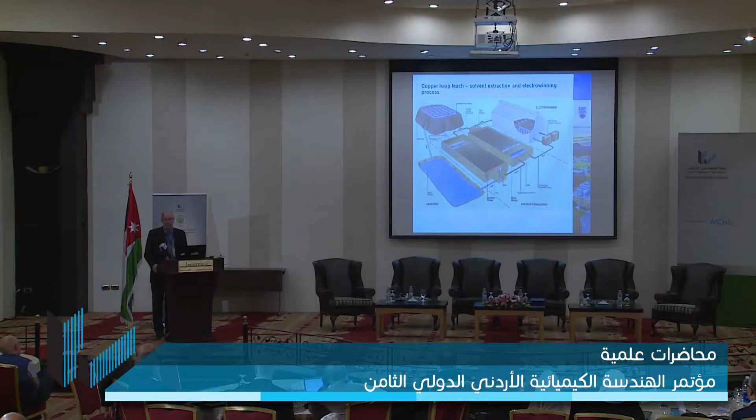So you see a pile of rocks which is being irrigated with an acid solution. The acid is percolating through the rocks and dissolving copper, which is recovered into a pond. The copper-bearing solution then goes through two stages of solvent extraction. So it's loaded on an organic solution, and then it's stripped using a stronger acid solution to make a concentrated copper solution, which then goes to electrolysis.

When the pad is finished, they then use drippers. It's like a farming operation, drippers on top of the pad to sprinkle sulfuric acid, which goes down through the rocks and dissolves copper. So the solution that's being collected in the ditches is a copper-bearing acid solution. That then advances to solvent extraction and electrowinning.

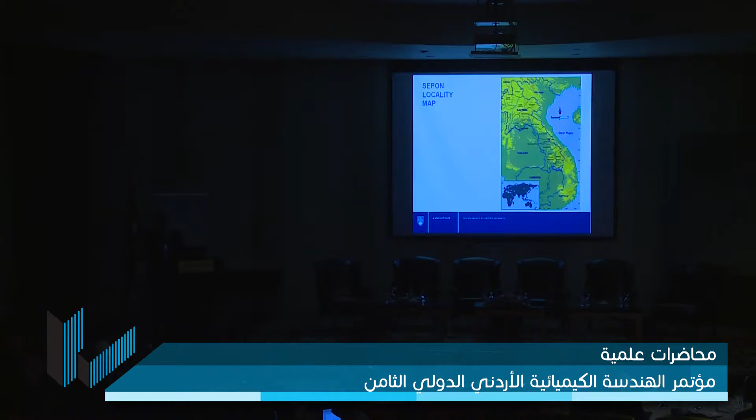When we started to look at this ore body, we found that whole ore leaching was effective at leaching copper from copper sulfides using a ferric-ferrous oxidation system. The trouble we had with the ore is that because of the clay present, the ore consumes a lot of acid, and the cost of acid in Laos is quite high. So in order to make the project economic, we had to determine a way to make our own chemicals in Laos, and this involved making ferric sulfate sulfuric acid solutions by recovering sulfur and pyrites from the leach residues by flotation and oxidizing those materials in a high-pressure autoclave.

And then the innovative part was the use of flotation at the end of the circuit in order to recover elemental sulfur and pyrites. The pyrites and elemental sulfur are directed to a high temperature autoclave where they're oxidized with oxygen in order to produce sulfuric acid and ferric sulfate. The sulfuric acid and ferric sulfate are then added to the main leaching circuit in order to meet the reagent demands for the process.

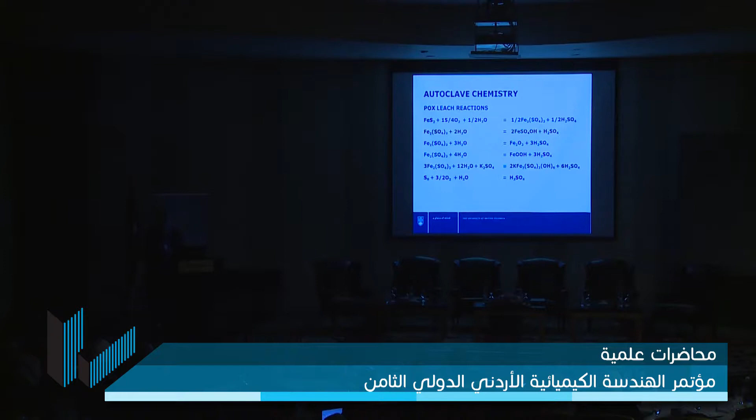So the reactions are oxidation, and in the case of basic iron sulfates, precipitation. So the red equation shows the formation of basic iron sulfates at high temperature in the autoclave. After the autoclave, the residue is allowed to condition at 95 degrees C for a number of hours, and this allows the basic iron sulfates to redissolve and form a very strong ferric sulfate solution before transfer to the atmospheric leach. So the post-autoclave conditioning step forms a very strong ferric sulfate solution, which is then used to attack the copper minerals and create leaching conditions.

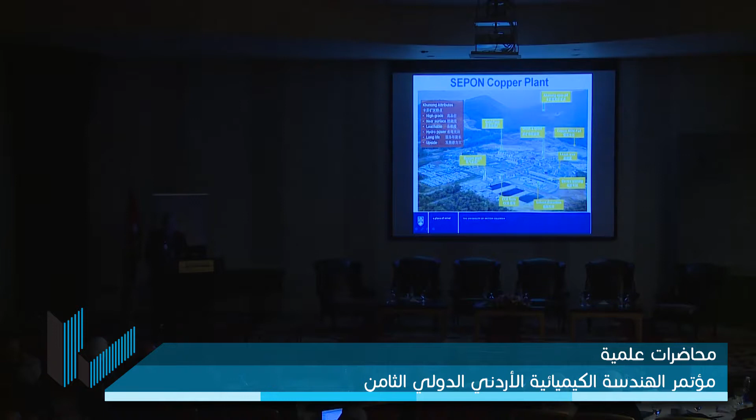The mine is on the slope at the top. The copper ROM pad is where the run-of-mine ore is placed from the mine. Crushing and grinding is the feed preparation of the ore. This is the leaching area. And then you can see the thickeners, which are used to do the solid-liquid separation and washing. The leachate recovered from the thickeners goes to solvent extraction and electrowinning. You can maybe make out a little bit of steam in the picture just shown here. This is the steam coming from the autoclave plant, and the autoclave plant is receiving oxygen from the oxygen plant just down to the bottom left-hand side.

Okay, a second example of a development in base metals is the development of a process called the Galvanox process by one of my colleagues at the University of British Columbia named David Dixon, and two of his students, Alain Tshilombo and Ghazaleh Nazari. The process is to leach chalcopyrite, which is a common problem in the field of hydrometallurgy, how to compete with high temperature metallurgy for the recovery of metals.

So the Galvanox process was developed as an atmospheric leach without bacteria, just containing sulfate, no fine grinding, produces high levels of elemental sulfur with low oxygen demand, no surfactants, selective for chalcopyrite over pyrite, fairly fast copper recovery, less than 12 hours, fully compatible with conventional solvent extraction and electrowinning, and conventional materials of construction.

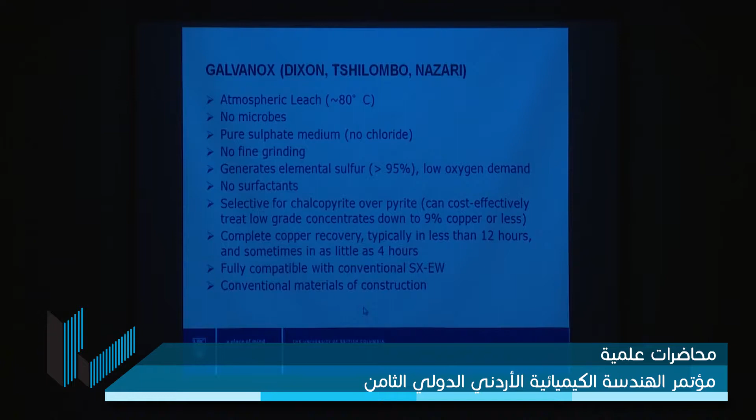So how does it work? Well, Galvanox is an attempt to use electrochemistry to aid in the decomposition of the mineral chalcopyrite. So Galvanox takes advantage of the galvanic effects that occur between chalcopyrite and pyrite. Chalcopyrite is a semiconductor, and we believe it corrodes electrochemically in oxidizing solutions. So we write the overall reaction for leaching. Chalcopyrite plus ferric sulfate goes to copper sulfate, ferrous sulfate, and elemental sulfur. But we can think about this reaction as having two components. One, an anodic process, which is the corrosion of chalcopyrite, and one, a cathodic process, which is the reduction of ferric to ferrous.

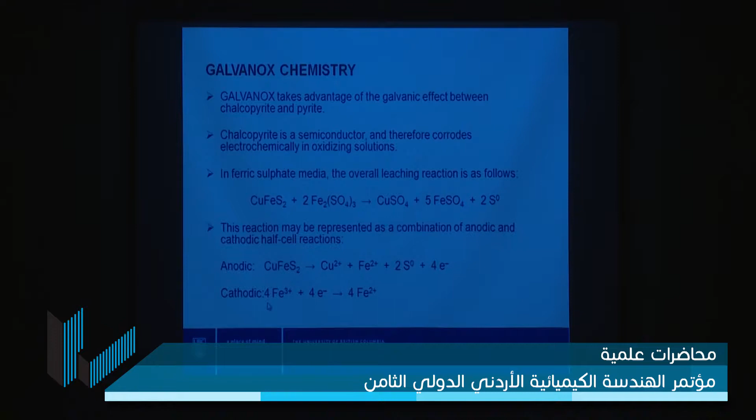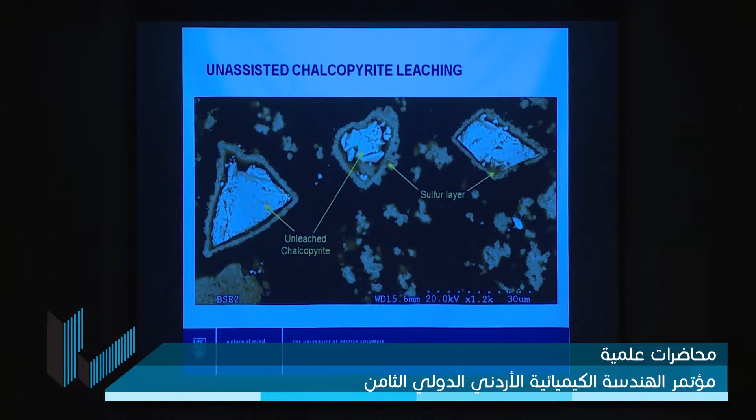So in terms of development of Galvanox, what my colleague studied was the passivation phenomena and trying to understand how to overcome it. And essentially they found that the passivation is probably taking place on the cathodic reaction, which is the ferric reduction reaction. And by putting pyrite, which is the iron sulfide mineral, in the system, they found it was possible to catalyze the cathodic process. And of course, the pyrite is considered inert and can be recycled.

So in terms of, whoops, lost something here. Oh, there we go.

In terms of the electric circuit with pyrite present, you can see that pyrite takes the role of being the preferred site for the cathodic process. So we now have contact between chalcopyrite and pyrite, but the cathodic process occurs on the pyrite. The electrons move from the chalcopyrite to the pyrite, and chalcopyrite continues to dissolve anodically.

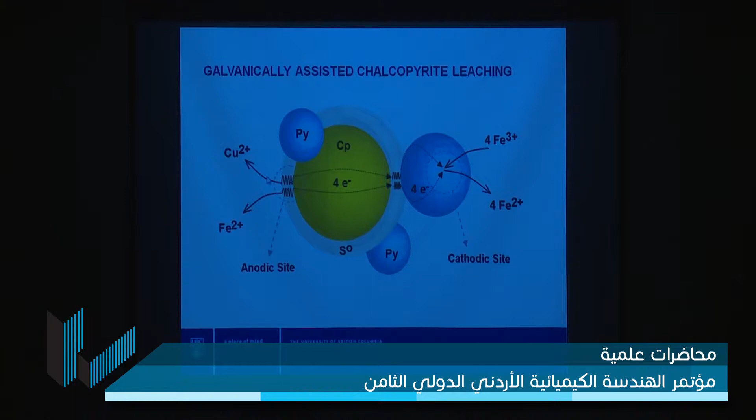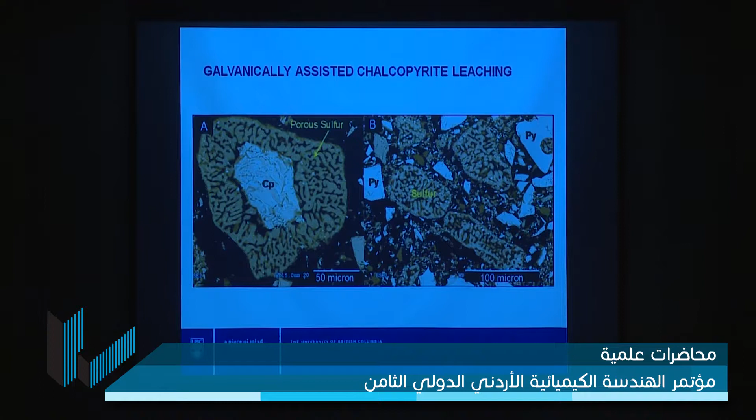On the right-hand side, on the B frame, you can see the products at the end. So now we have a particle of elemental sulfur that used to be a particle of chalcopyrite, many particles of elemental sulfur, and then many other particles of pyrite, which is not reacted. It's present simply as a catalyst in the system to aid in the electrochemical breakdown of the chalcopyrite.

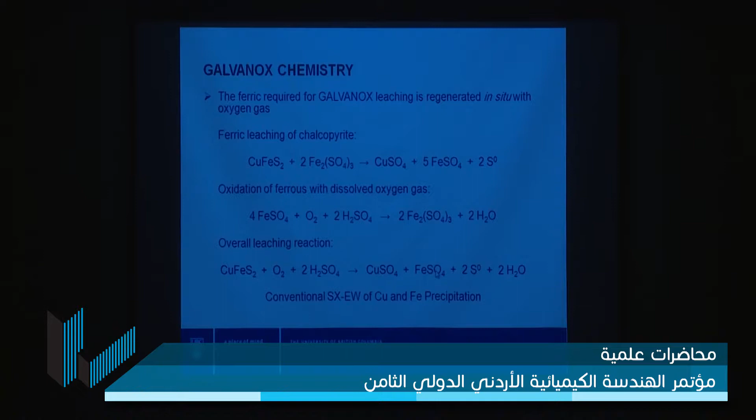So in terms of completing the process, we want to do chalcopyrite leaching under Galvanox conditions with ferric sulfate. We have to regenerate ferrous to ferric using oxygen. So the overall leaching reaction is actually an oxygen leach, where the oxygen is regenerating ferric to allow the oxidation of chalcopyrite to continue. The copper sulfate is treated by SX-EW again, and the iron sulfates are treated by precipitation to reject an iron waste product.

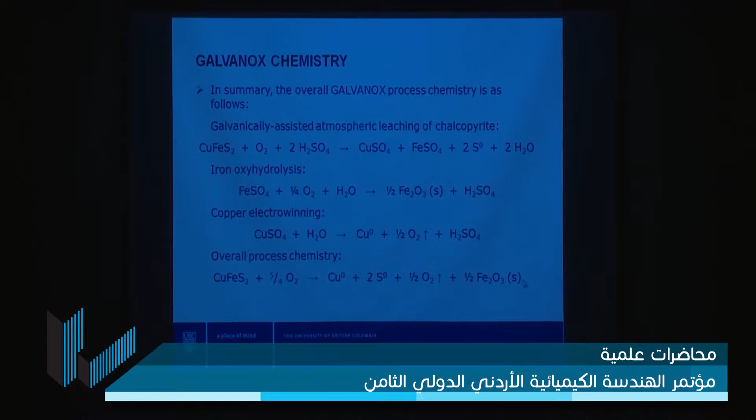Okay, so here's the iron oxyhydrolysis reaction, copper electrowinning, and if you were to add all the reactions together, you find that chalcopyrite enters the process, oxygen is added for leaching, copper metal comes out, elemental sulfur is formed, oxygen evolves in electrowinning, and iron oxides are produced as the waste product.

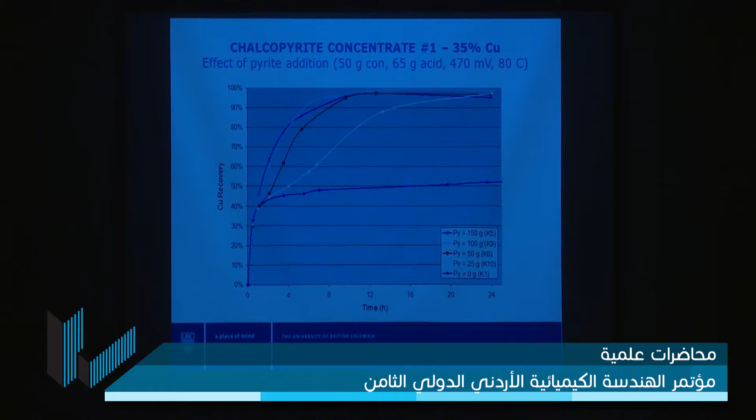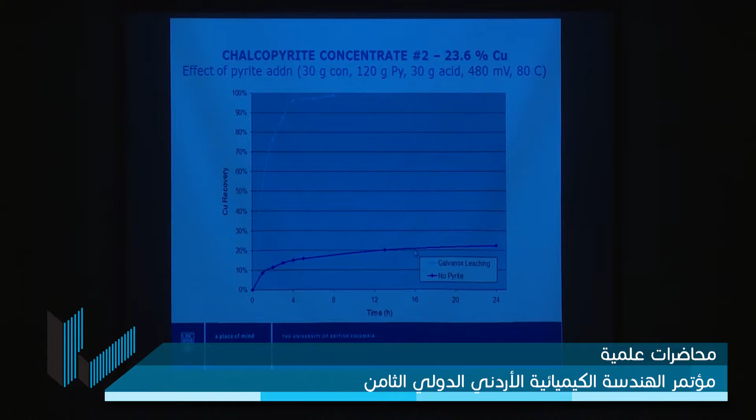With the introduction of increasing amounts of pyrite as a catalyst under Galvanox conditions, the leaching quickly approaches completion within about 8 to 12 hours. So it shows the efficiency of the catalytic system. Here's another concentrate, somewhat lower grade, 23% copper. You can see that 20% copper is all that leaches directly, but with the addition of pyrite again, within 8 hours we're approaching 100% extraction of the copper.

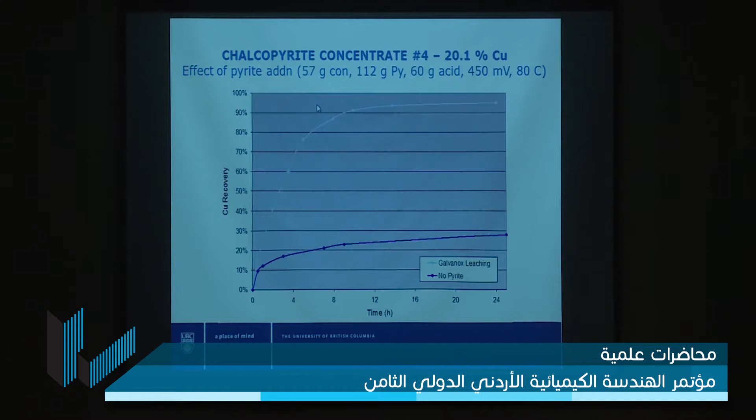Here's one that has a bit different behavior. It keeps leaching, but it's taking a long time to get to the end. But again, with pyrite addition, there's a benefit. Another one similar. And then finally, this is an example of a chalcopyrite bulk concentrate recovered by flotation. In this case, there was already some pyrite that was floated with the chalcopyrite, and you can see the mixture is catalytic without any requirement for extra pyrite addition.

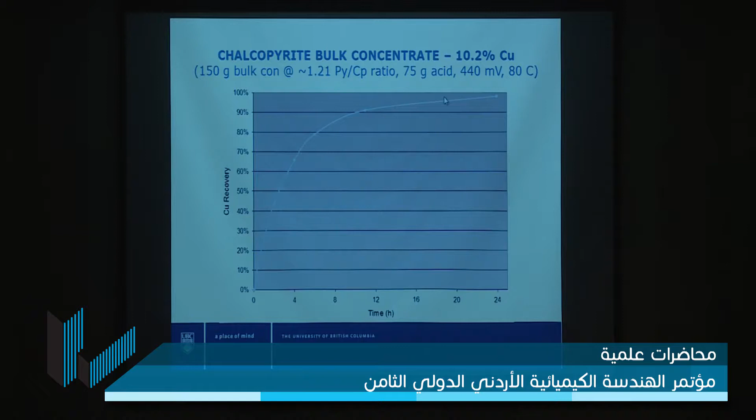So in terms of studying the Galvanox process, some of the key questions that have been asked are: are all pyrites equal in terms of their catalytic abilities? The answer to that is no. Can pyrite be improved in catalytic ability? The answer is yes, and the key element that makes one pyrite better than the other is having a little bit of silver on the surface.

Third question is, how do you have galvanic contact when the chalcopyrite gets coated by elemental sulfur, which is a natural insulator? This has an interesting answer. And what about other copper minerals besides chalcopyrite? There's a lot of interest globally now in the copper arsenic minerals, which are found widely in nature. The mineral is called enargite. Can we adapt Galvanox to treatment of these minerals? And the answer is yes. We can leach other minerals besides chalcopyrite with Galvanox.

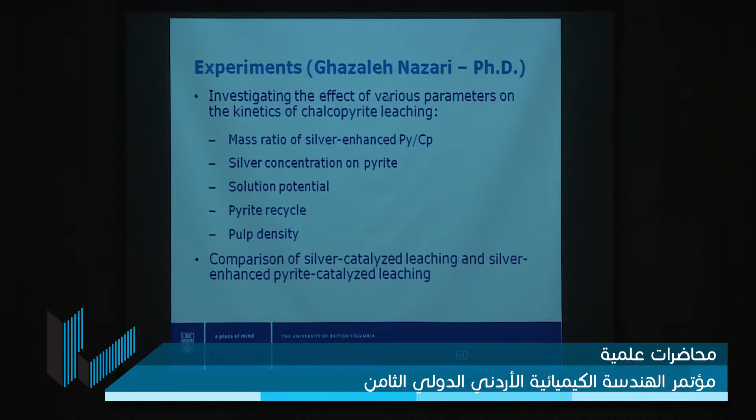She then took some pyrites and did Galvanox experiments, and you can see that the results aren't nearly as good as the ones that we saw previously. We were leaching in sort of 8 to 12 hours. The time frame here is 100 hours. The ratio is 6 to 1 pyrite to chalcopyrite, and in a couple of cases we're getting eventually to 100%, but it's very slow. And in one case, we've actually done worse than the uncatalyzed system, finishing at less than 40% copper extraction in 100 hours.

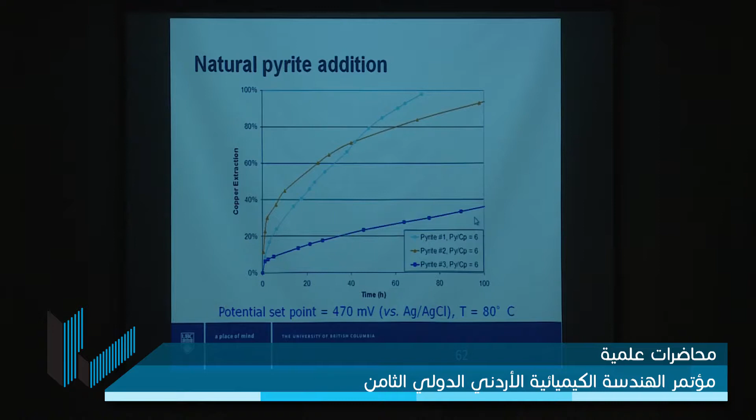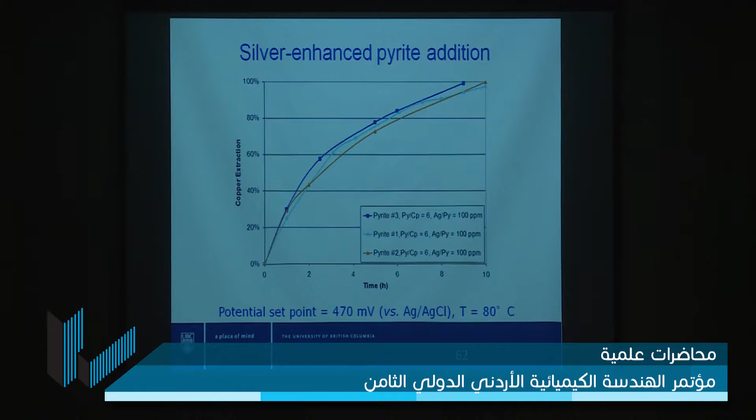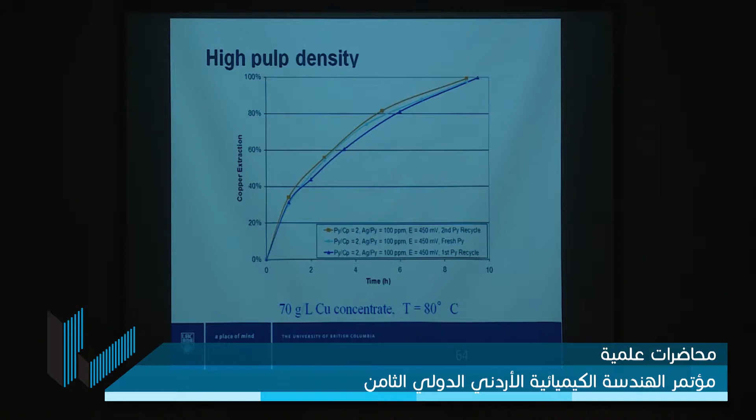If we recycle them, the pyrites can continue to be catalytic. You can see the recycling shown here on the left. Sorry, this is the fresh pyrite, and this is the recycled pyrite. So the recycled pyrite still has catalytic ability. We can also work at higher percent solids, which is important for an industrial process. This would produce a solution of 70 grams per liter copper at 80 degrees Celsius.

What about this problem of insulation? So in terms of the electric circuit, the electrons have to move from the chalcopyrite to the pyrite, and they have to go through this elemental sulfur layer that grows around the surface of the dissolving chalcopyrite particle. Well, it turns out that the silver that's present in the system plays a very important role in promoting conductivity of the sulfur layer. So if we look at the sulfur conductivity with silver present in the system, we've got a resistivity of 1 to 10 to the 7th, and without silver, it's almost 6 orders of magnitude more resistive.

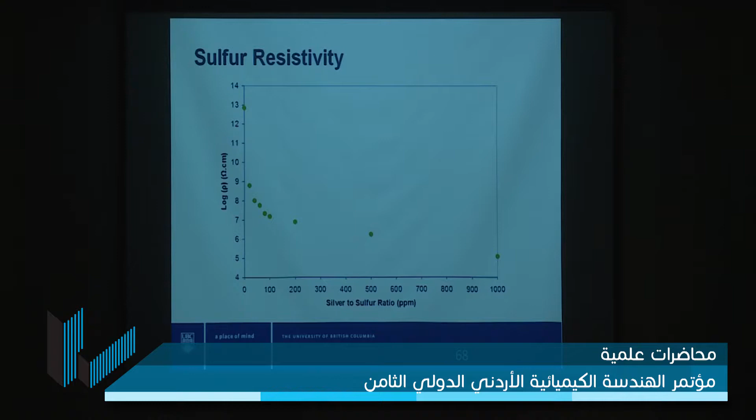So the silver seems to make the pyrite more catalytic, and it also has the benefit of making the sulfur layer more conductive and allowing the electric circuit to maintain the current density that's required for leaching. This shows the measured resistivity of sulfur as a function of the silver content of the sulfur. So even a few parts per million of silver in sulfur dramatically increase the conductivity and allow that electric circuit to continue.

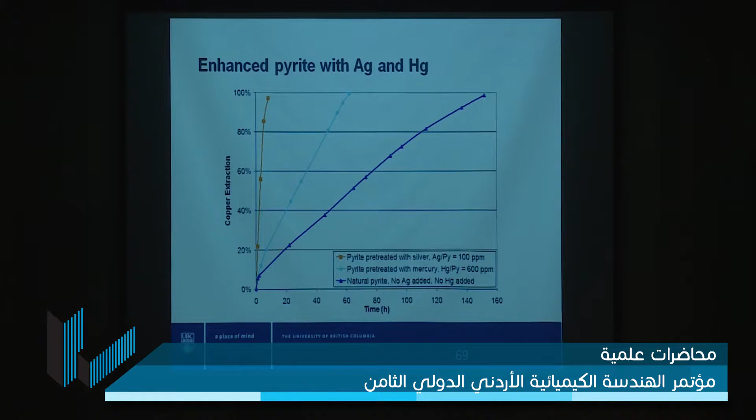We also looked at other catalysts besides silver. Turns out that mercury also has a beneficial role in the Galvanox system. Of course, the toxicity of mercury makes it less desirable as an additive, but the science says it's interesting that another element can also have the same benefit. So in terms of Galvanox, a process was developed for chalcopyrite leaching that used small amounts of silver added to pyrite. The calculation was about 60 milligrams of silver as a makeup required per kilogram of copper recovered.

The acceleration of chalcopyrite leaching was due to the galvanic interaction between the minerals. Pyrite is critical and provides a surface for ferric reduction, and silver seems to have a critical role in terms of decreasing resistivity of the sulfur layer and also increasing the catalytic properties of the pyrite and the rate of ferric reduction to ferrous on the surface of the pyrite.

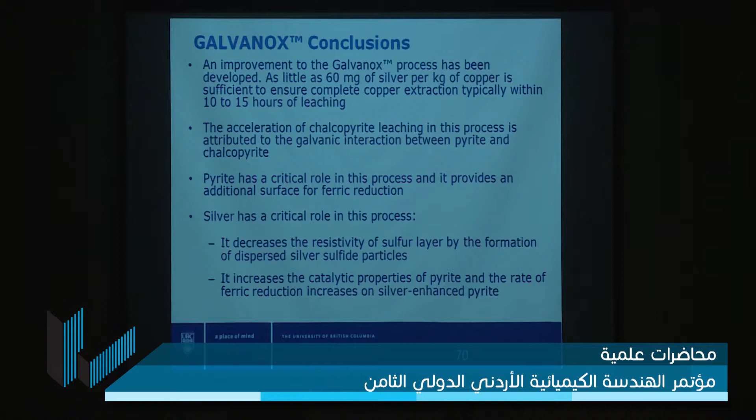Okay, a third example from the base metal field is the recovery of lead from natural ores. And here I want to talk about the INCOR lead process. So lead is normally recovered from nature or from natural materials using high temperature pyrometallurgy. So at the mine, a lead sulfide concentrate is floated. The lead sulfide is then roasted or smelted. This produces SO2, and of course can also produce dusts and gases that contain lead.

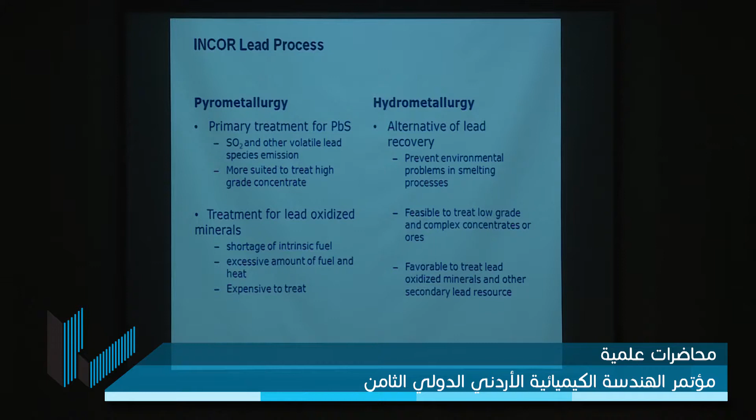You can also treat oxidized minerals or oxidized materials using pyrometallurgy. If you treat oxidized materials, there's no fuel, so you have to incur a lot of expense for fuels and heat. Hydrometallurgy is a great alternative for lead because, of course, it's low temperature. We prevent the environmental problems from the smelting process. We can treat lower grade or more complex materials, and we could perhaps treat oxidized minerals or secondary lead resources.

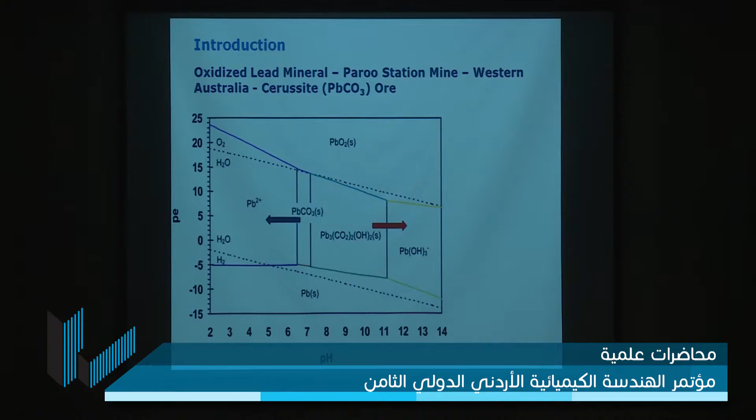In terms of the thermodynamics of the lead system, this shows that if you've got lead minerals in nature, this is a lead carbonate type mineral, you can leach it by going to lower pH or to higher pH. This mineral is found at a mine in Australia, the Paroo Station mine in Western Australia, where the mineral cerussite, lead carbonate, is the predominant mineral.

So what did we look at in terms of hydrometallurgy for lead? Well, we wanted to find an acid that could leach lead with high solubility for lead. We wanted to overcome any difficulties in downstream processes and wanted to have a much lower environmental footprint. So we started to work with an acid called methane sulfonic acid. It's regarded as a green acid. Not sure exactly what the word green means here, but it's more favorable than some other chemical products.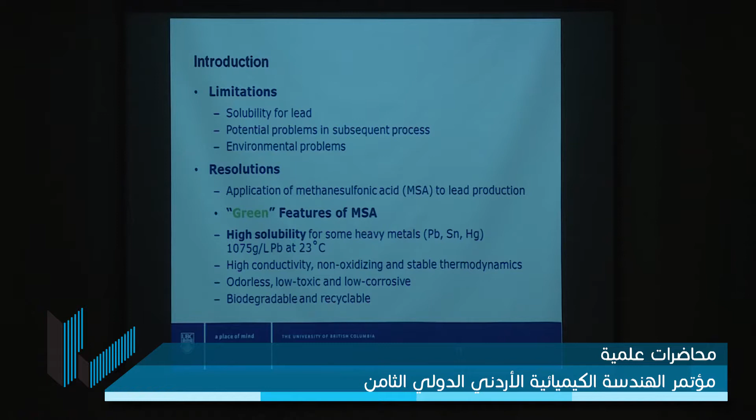It has high solubility for heavy metals. You can see that the solubility for lead in methane sulfonates is more than a kilogram of lead per liter of solution. It's got high conductivity. We need higher conductivity here. There we go. High conductivity. It's non-oxidizing and has stable thermodynamics. It's odorless, low toxicity and low corrosivity, and it's biodegradable and recyclable.

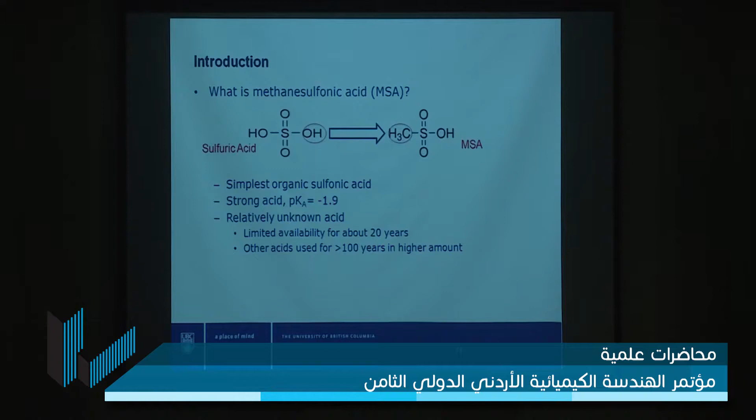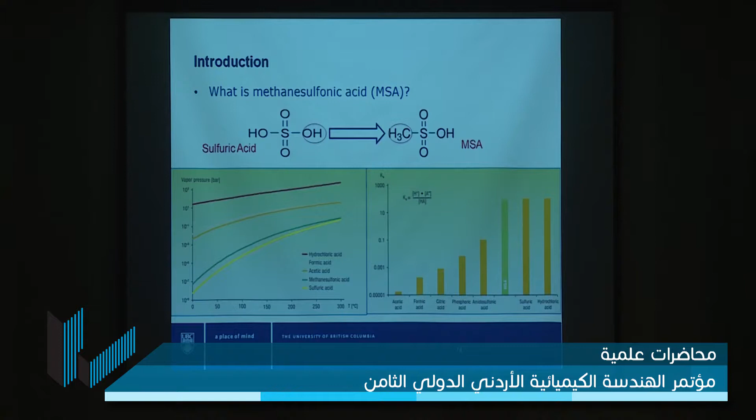So what is it? Well, it's like sulfuric acid, except one of the OH groups has become CH3. So it's the simplest organic sulfonic acid. It's got a pKa similar to sulfuric acid, and it's being produced industrially now in greater and greater quantities. And this just shows the vapor pressure and the pKa for the different acids. And you can see that sulfuric acid and methane sulfonic acid have very similar vapor pressures and pKa values.

So what do we do with the acid? Well, the acid has a high solubility for lead. So we take our concentrate from the mine, the cerussite concentrate, we leach it with the acid, we filter and wash the leachate, we go through some purification, and then on to electrowinning. And that allows us to produce lead metal directly.

In the ore in Australia, there is a little bit of lead sulfate. So we have a separate circuit that deals with the small amount of lead sulfate, first by desulfurization, and then by another methane sulfonic acid leach. We've also adapted the chemistry to treat galena concentrates, lead sulfide concentrates, again using the ferric system in the methane sulfonate system.

So there's the oxidized lead mineral leaching, and there's the lead sulfide mineral leaching. There's the desulfurization chemistry. We can use sodium carbonate or sodium hydroxide, but it allows us to convert the lead to the soluble form, lead carbonate or lead hydroxide.

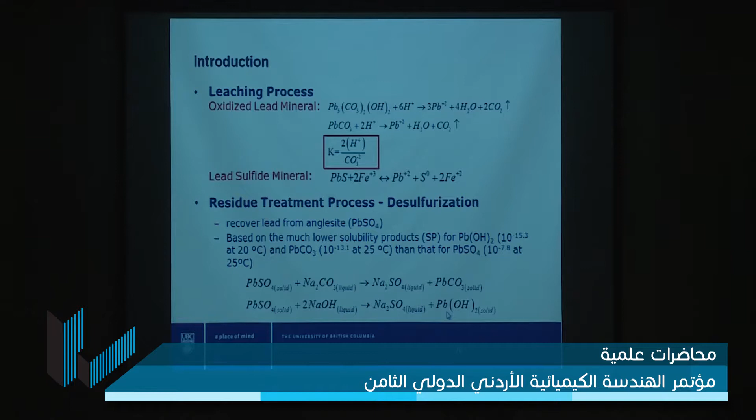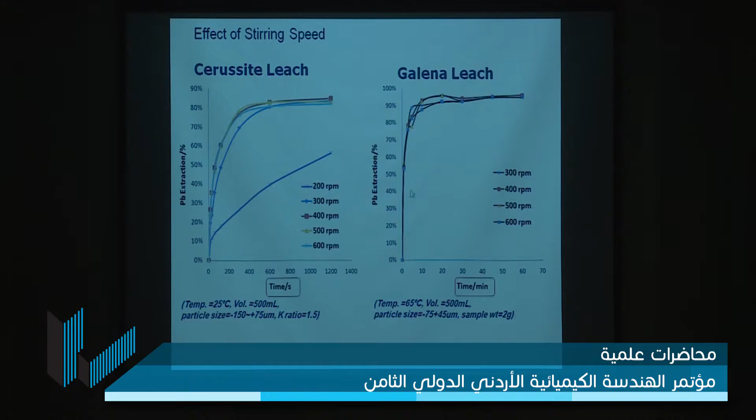The reaction is extremely fast. So the scale here is seconds. So this represents 600 seconds is 10 minutes. You can see that the leaching is basically complete within 10 minutes, as long as we have enough mixing in the system. In the galena leach, you can see it's also complete in about 10 minutes. So very rapid leaching with high solubility.

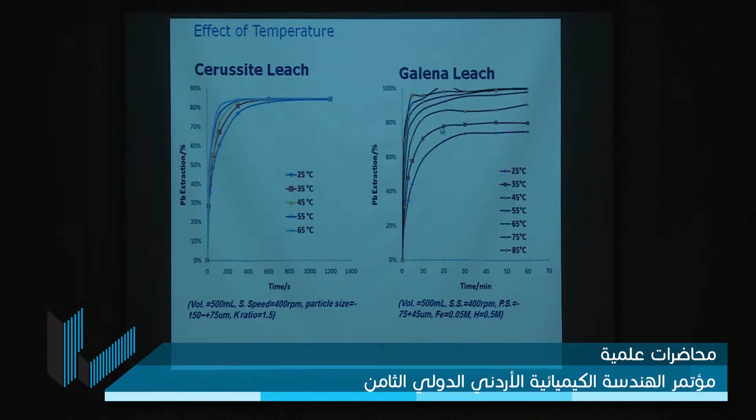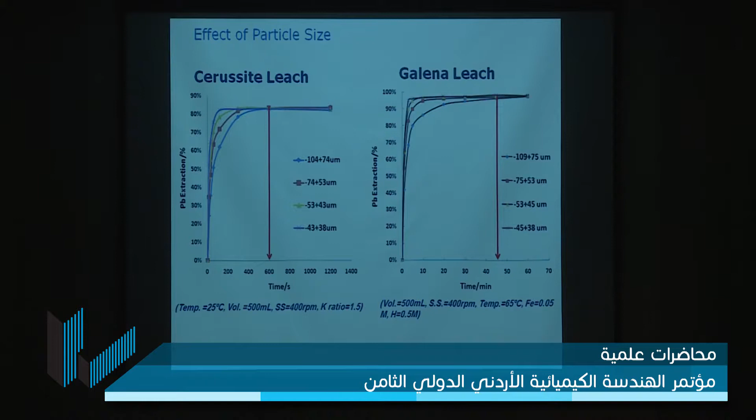Temperature doesn't make a huge difference to the cerussite leach. It makes some difference to the galena leach. Particle size, even coarser particles are leached very quickly, all within 10 minutes for the cerussite and roughly 45 minutes for the galena.

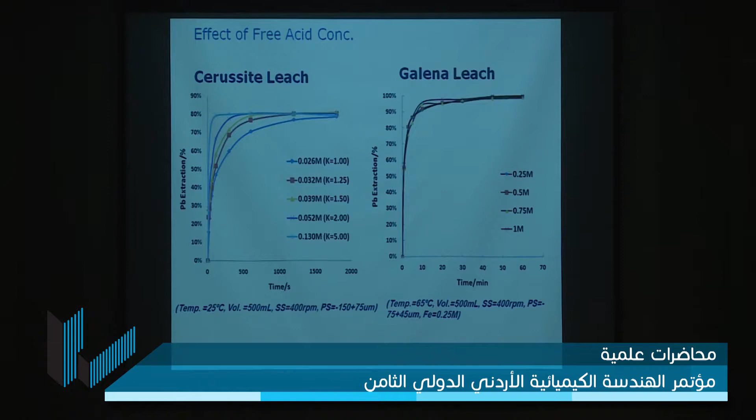Effect of free acid, very small effect. If you start to run out of acid, the leach will slow down a little bit for the cerussite, but the galena is quite effective over a wide range. And if you run at higher pulp density, you can see that we can easily make solutions of more than 100 grams per liter lead by leaching the cerussite.

When we combine the two steps of primary leaching and then the desulfurization leach, you can see the primary leaching recovers about 85% of the lead, and with the desulfurization leach, we're getting a total recovery of around 98% from the ore. We're doing a study now for the mine in Australia; this will allow the mine in Australia to make lead right at the site and not have to ship their concentrate overseas to a lead smelter.

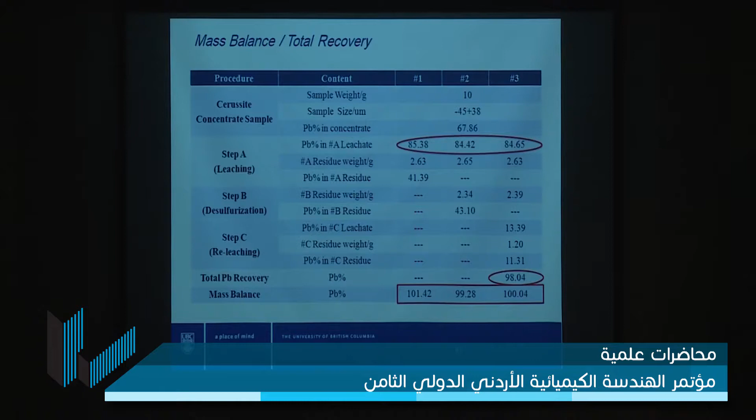We can then electrowin lead. The nice thing about lead is it has a very high molecular weight, so the energy requirement per kilogram of lead is quite low. It's only about 0.53 kilowatt hours per kilogram of lead to plate lead from solution.

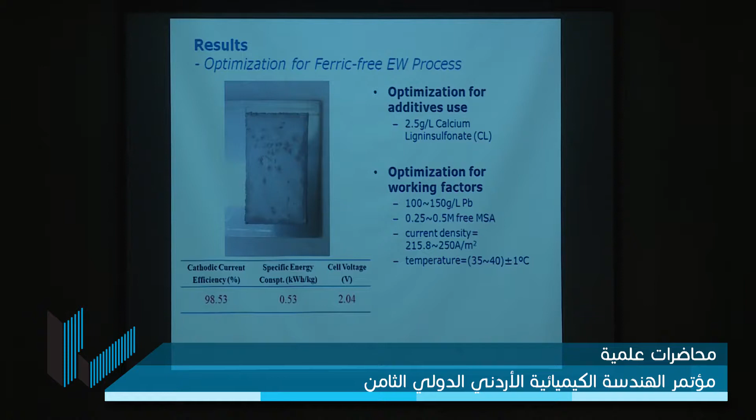So methane sulfonic acid is very suitable for treating lead concentrates. The kinetics are very fast. Total recoveries approach 100%. We can electrowin the lead as a smooth deposit using different additives like calcium lignin sulfonate. And you can operate the lead electrowinning under a wide range of conditions. Current efficiency and energy consumption are very respectable.

And currently we're doing a feasibility study with the mine owner in Australia with the goal of trying to build the first lead refinery of this type in Australia starting next year. What about precious metals? These are far more interesting than copper and lead. Well, two major developments to highlight here. One has been commercialized and one is still being commercialized.

The large Canadian mining company Barrick Gold has now commercialized the use of thiosulfate as a replacement for cyanide for gold leaching. So thiosulfate is used as a replacement for cyanide to extract gold from oxidized residues coming from autoclaves. The reason for the use of thiosulfate at the Goldstrike site in the US is that when you form a complex between thiosulfate and gold, it doesn't absorb on carbon.

Turns out the ores in the Goldstrike mine contain natural carbon, and if you try to leach with cyanide, the gold cyanide complex is reabsorbed back into the natural carbon in the ore. So the thiosulfate overcomes that limitation and allows the gold to be recovered without what they call preg robbing of the gold. So they recover the gold thiosulfate complex on a resin using a resin leaching process, and then they elute the resin and electrolyze the gold to produce the gold metal.

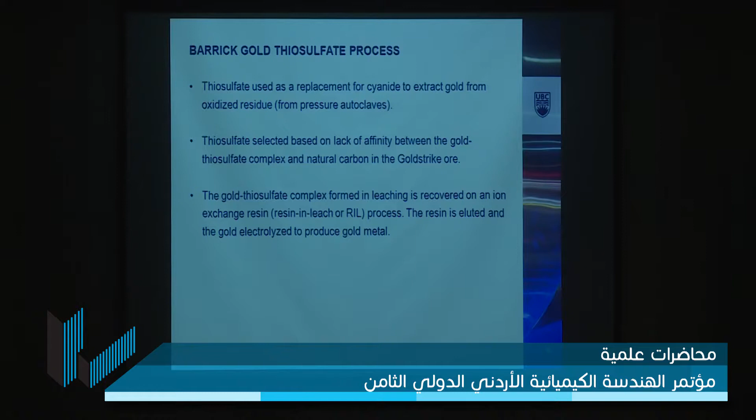And then the two other bits that are new are they actually had to make their own plant to make thiosulfate at the gold mine because the demand for thiosulfate was so great. And they also have what they call a reagent recycle area where they take some of the dilute solutions from the plant and they use reverse osmosis to concentrate the reagents for recycle. And this allows them to minimize the cost of reagents for the gold leaching. They're now recovering about 400,000 ounces of gold per year using this technology at this plant in Nevada.

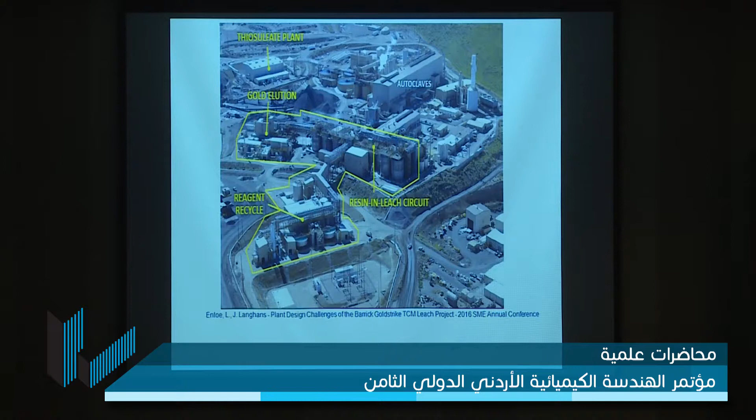Second example that relates to precious metals is the development of what's called the Platsol process. So Platsol was developed as kind of a simple process for one-step extraction of both base and precious metals. It was invented at Lakefield Research in Canada, and it's gone through a series of test programs using batch testing and continuous testing to prove the merits of the process. And you can see that we get very high levels of base metal recovery and also precious metal recovery using Platsol.

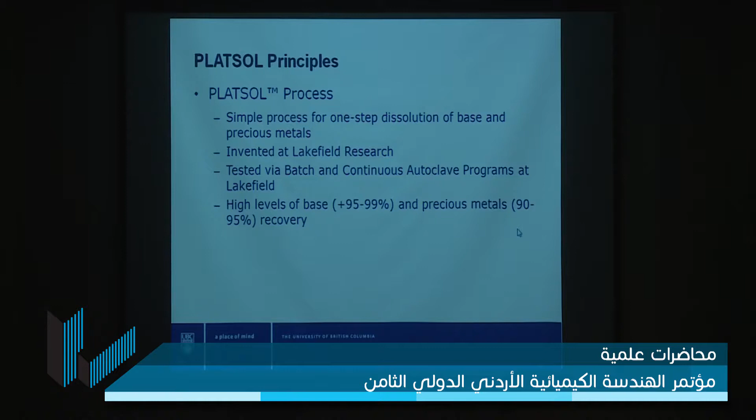The target for the development of the technology was a mine in the United States called NorthMet, which is owned by a company called PolyMet Mining. PolyMet Mining has the name PolyMet because there's many different metals contained in the ore at NorthMet. You can see that it's got copper, nickel, cobalt, of course iron and sulfur are there. Whoops. And then there's gold, platinum, and palladium also in the ore.

If you try to concentrate the material, you can make a bulk concentrate that contains the copper, nickel, cobalt, platinum, palladium, and gold, but the material is very complex, and smelters don't usually like complex materials, so we had to develop our own technology for recovery of metals from the concentrate.

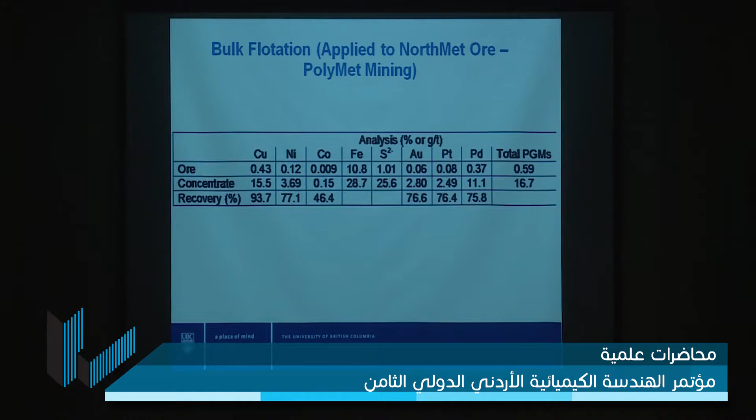So we found that when we do a high temperature autoclave treatment of the ore, if we do it under conventional conditions, we get very high extraction of the metals, the base metals, but generally low extraction of the precious metals. And that's because the precious metals aren't soluble. Palladium is a little bit soluble, but platinum and gold are not soluble at high temperature.

If we use the Platsol conditions, we once again get very high extraction of the base metals, but now our precious metals are also extracted. And what's the difference? Well, the Platsol process uses small amounts of salt, sodium chloride, or perhaps hydrochloric acid, in order to create the conditions necessary for precious metal extraction.

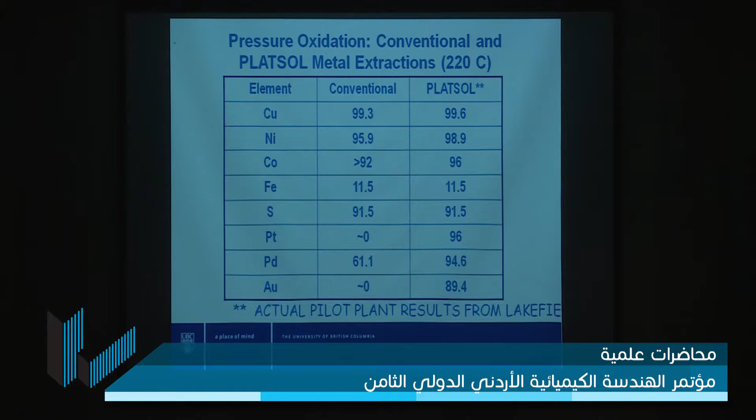So under PLATSOL conditions, all the metals are recovered. The process involves addition of chlorides to the high temperature oxidation, which promotes the precious metal recovery. The PGMs, copper, nickel, and cobalt, can then be selectively recovered. And the following slides show some of the chemistry.

So when you go into a high temperature autoclave with oxygen, the minerals are oxidized completely. So copper iron sulfides become copper sulfate, hematite, and acid. Pyrites become hematite and acid. Pyrrhotite, hematite, and acid. Nickel is nickel sulfate. And we can also get some of these basic iron sulfates forming once again.

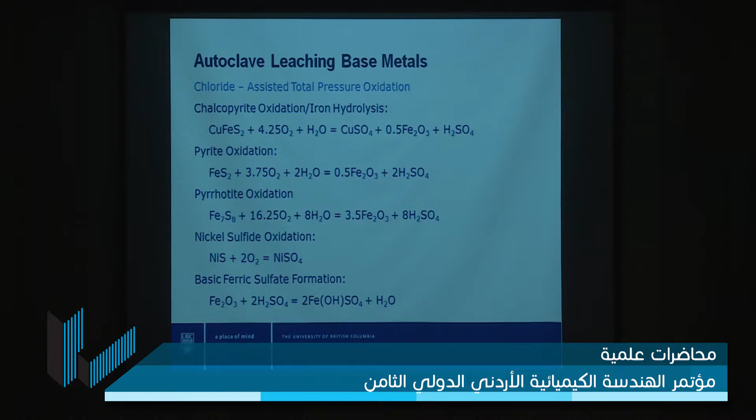When we put some form of salt in the autoclave, we already have acid from the oxidation of sulfur, so we can imagine that we have HCl present. So the metal, the oxygen, and the HCl react together to give us the metal dissolved species, in this case the auric chloride, or the platinum chloride, or the palladium chloride. This occurs readily at temperatures of 220 to 230 degrees C and produces a barren solid which can be washed and discarded.

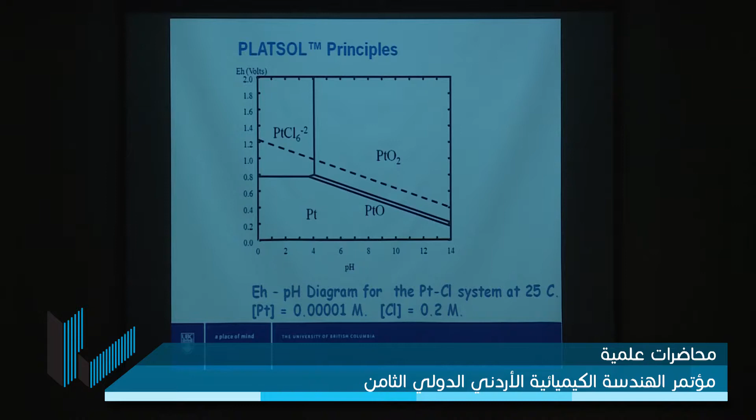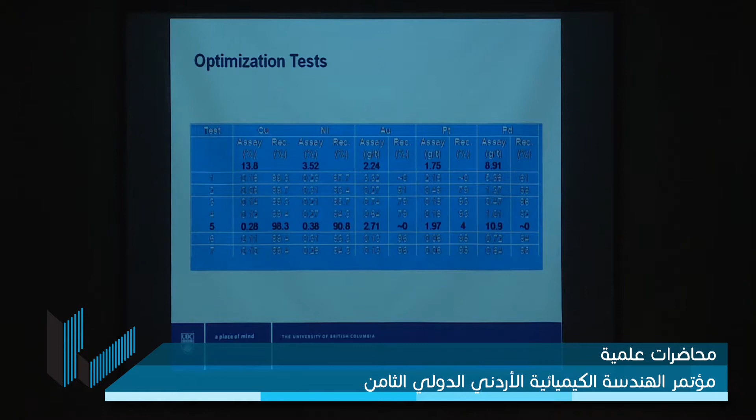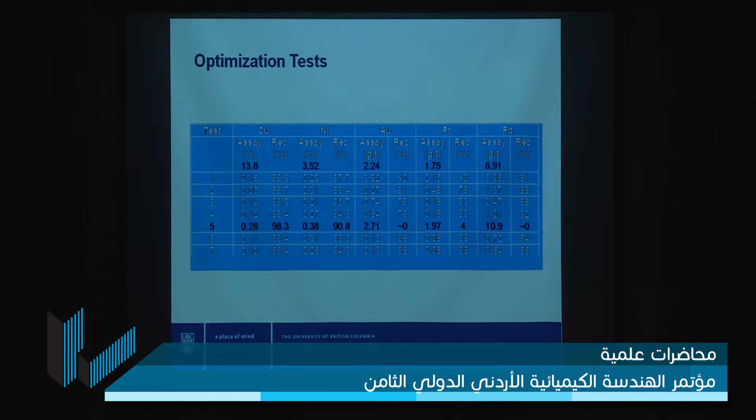We did many different tests in the bench scale showing the effect of different conditions. The one that's most interesting in this table probably is the lower temperature one, 200 degrees Celsius. Oh, that didn't turn out very well. But I'll just say that test number 5 produced very low recovery of gold, platinum, and palladium, because at 200 degrees Celsius the oxidation wasn't complete. We didn't get to that high oxidation condition in the top of the thermodynamic diagrams.

How do you recover the metals from the leachate? Well, copper can be recovered by SX-EW and nickel by precipitation. The precious metals can be precipitated. In this case, they were precipitated with sodium hydrosulfide, which drops the potential of the system and makes a sludge that carries the gold, platinum, and palladium. You can see the grade now is many hundreds of grams per ton, so very valuable sludge coming from the precipitation process.

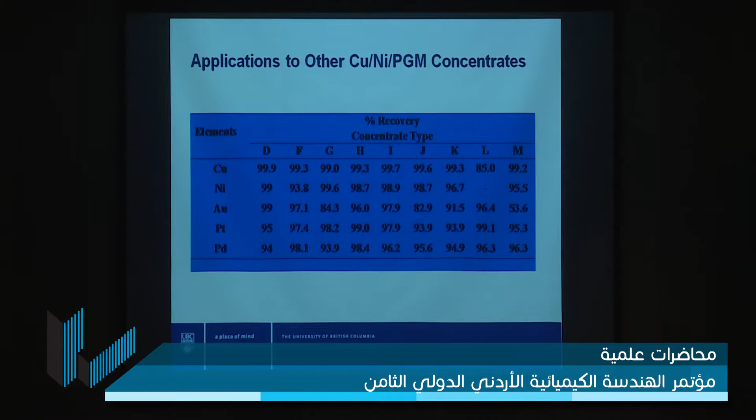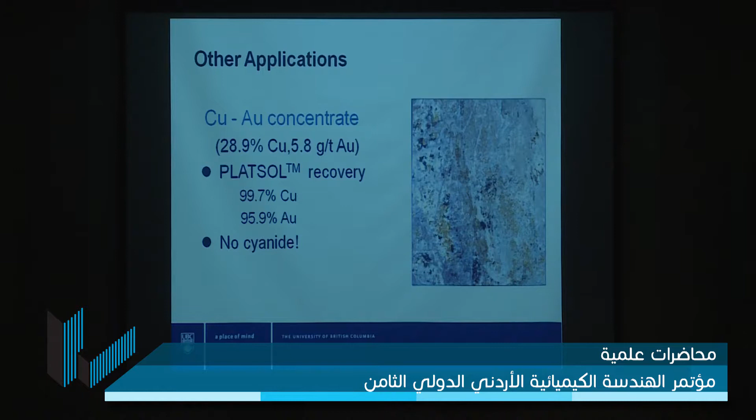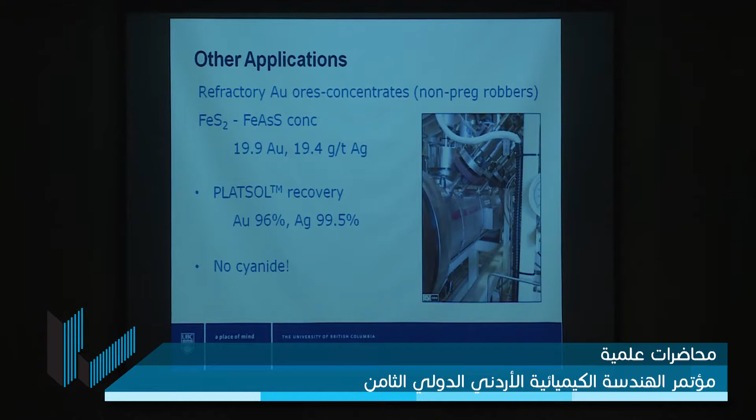We've also tested the chemistry for copper-gold concentrates, refractory gold, precious metal mattes, platinum-containing laterites, and automobile catalysts. You can see the copper-gold concentrates. So directly in one step recovering almost 100% of the copper and 96% of the gold, and no use of cyanide. Here's a refractory gold ore concentrate. Again, 96% gold, 99.5% silver, no cyanide.

I do have an example of rare metals as well, which I think in terms of my time I'm going to have to probably skip to allow a few minutes for questions. But we do have a large deposit of rare earths in the eastern part of Canada, which we're working on development of recovery, and hope to have a mine in the next number of years for recovery of rare earths in Canada.

So in conclusion, I just want to emphasize that the world needs more materials and more variety of materials. Hydrometallurgy is a wonderful discipline for the use of water-based chemistry to recover metals from all different raw material sources. The world needs more base metals, more precious metals, more rare metals, and hydrometallurgy can play a key role in providing the supply chain for life in the 21st century.

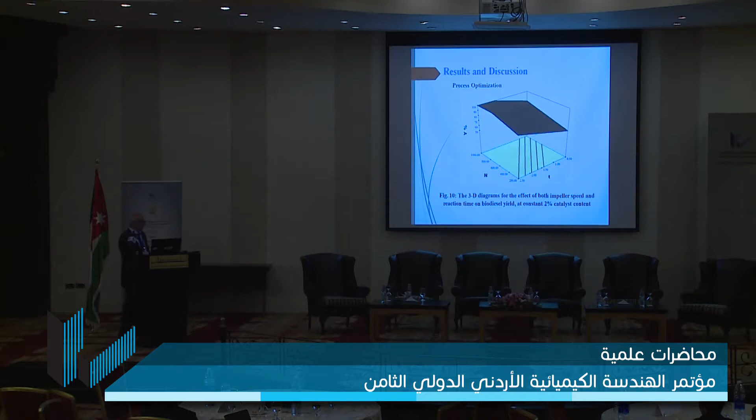This figure shows the effect of RPM linearly. The effect of reaction time, as shown in the previous figure, is also linear. Process of optimization: the practical optimum yield is about 96% at conditions of 800 RPM, 2% catalyst, and 2-hour reaction time, in 3D and contour figures.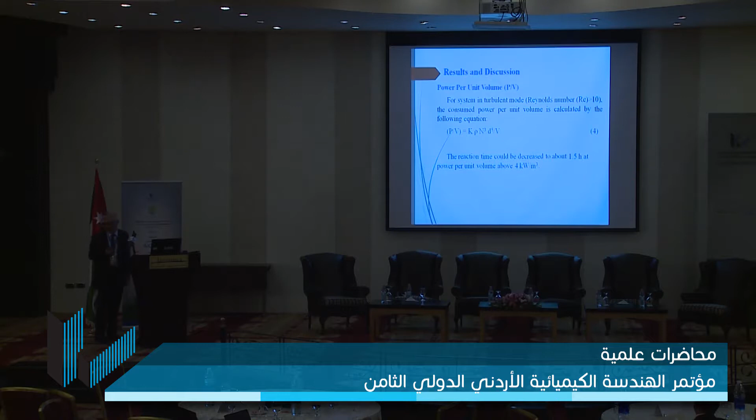Conclusions. The yield of biodiesel increased linearly with increasing both impeller speed and reaction time in the range studied. The effect of the two variables was almost identical. A negative effect of catalyst amount above 2% on the biodiesel was found. The practical optimum yield of the biodiesel was about 96% at operating conditions of 800 RPM, catalyst 2%, and reaction time 2 hours.

First order reaction with respect to the concentration of triglyceride was found at conditions near the optimum. The reaction rate constants were 1.3, 1.7, 2.2 for impeller speeds 600, 800, and 1000 RPM respectively, corresponding to power per unit volume, which is more representative than the speed, of 0.9, 2.2 and 4.3 kilowatt per meter cubed.

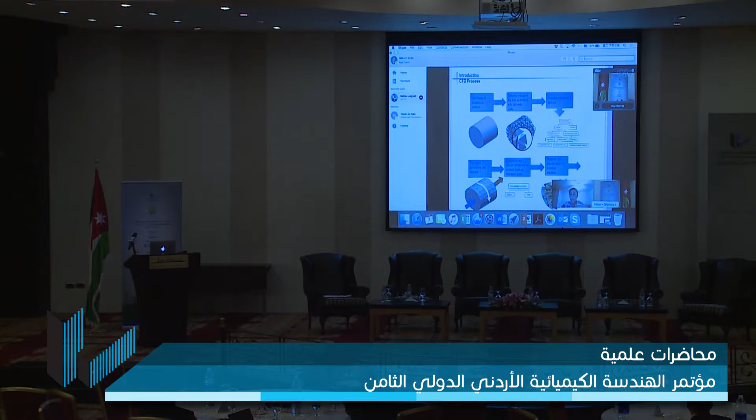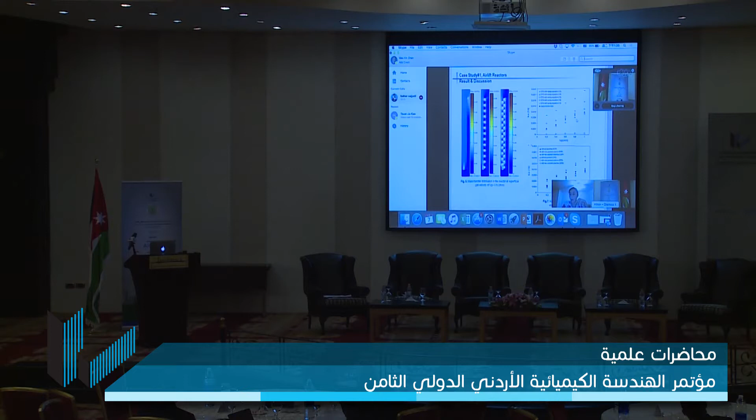And about the different models that we selected, you could see easily that in one of them we have a large overestimation, in the other we have a large underestimation. But in three of them we reached almost good results. The results of these papers were published in International Communications in Heat and Mass Transfer.

The next case study is membrane system. In recent years, membranes received great attention because they can play the role of both separator and reactor. For example, in biodiesel production, in bioethanol production, in wastewater treatment, in all of them we can see the application of membrane reactors, because in this system we can selectively remove the products from the reaction mixture, we can control the addition of reactants, and we can intensify the contact between reactant and catalyst.

In our case, we wanted to use membrane system to increase the yield of biodiesel production through transesterification. So, at first I would like to discuss the transesterification reaction. Transesterification is the most common reaction used for biodiesel production.

In fact, it's a three stepwise and reversible reaction, in which at the first step, triglyceride is converted to diglyceride, then diglyceride is converted to mono, and then to glycerol. At the end of this reaction, we have 3 molecules of biodiesel and 1 molecule of glycerol.